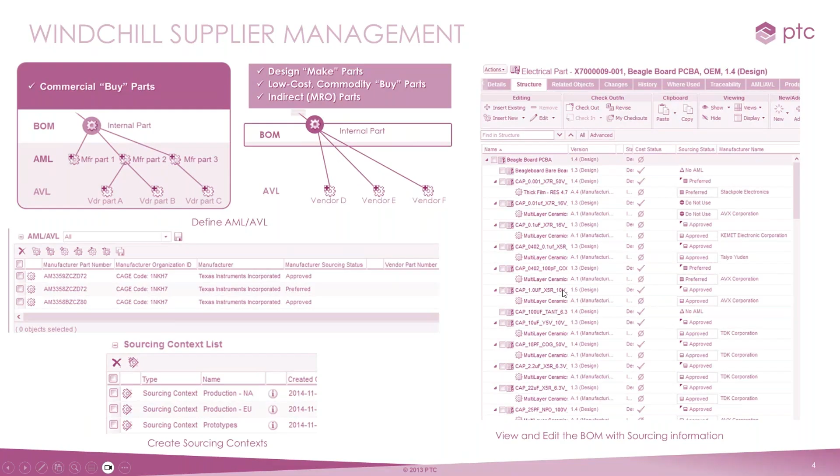All right, so we're going to go ahead and jump into a demonstration.

The first thing we're going to deal with is the actual part classification. We're going to go through and find files. By using part classifications, when you go into the search tab, you still have your saved search information, that's all still there. You still have your advanced search where you can categorize and even use some of the attributes you define as search criteria.

But we also have a classification explorer, so we can go through and set up classifications. Now, this is once again one of those PLM type things, and we're using WT parts, so this is where all that information begins to grow. This isn't directly associated to a CAD file. The CAD file can be associated with the WT part file, but all this information we're collecting is directly associated with the WT part files.

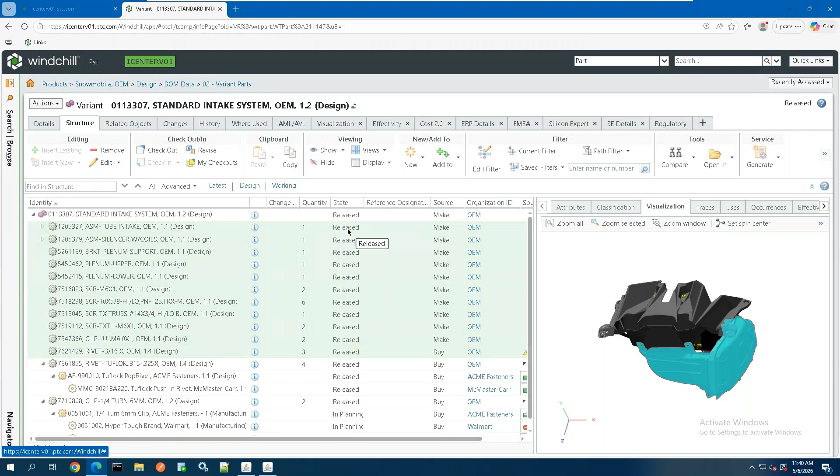That may actually have, yeah, like this one. We may have one that's a manufacturer, and I don't know why we're doing it from Walmart, but Walmart is the preferred vendor for that particular object. So if it's a manufacturing, or once again, if it is a make object that's actually happened to be a buy, sorry.

But if we do have a make object, then the same thing goes. We can go into this particular file. I'm just going to go to the information for it. And then the same thing inside of here. Now we're just going to go through and define who is the actual vendor that we're going to buy it from. So with that, come over here. We are doing a vendor, and this is going to give us the vendor information. And now we go through and specify who we're actually going to go through and make this for us. So all of that is there.

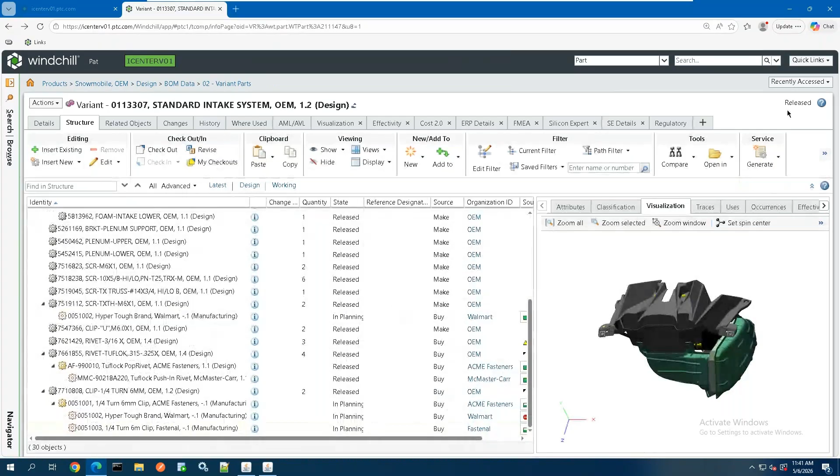Now, once again, the benefit of all of this is that this information, as we see it, can then be exported. So I can come over here, do my report, and do a report that shows multi-level with approved vendor and approved manufacturer list. So now we can go through and actually see this information, and we can see once again at the bottom there is that exact information that we wanted. And now we can go through and export this as one of those object types or file types. So we have it all there.

And once again, this is now where we have that connection with purchasing. We can have that connection with manufacturing. We can have that connection with our ERP environment.

Any of that information that we want to go through and translate from one to the other, we now have that information inside of our Windchill environment as well. So this is now where we can sync up those two objects, as far as, yes, we found the files, which is great. So we use the classification to find the files. Not only did we find the files, but now we also see where we should purchase the file from.

So I'm not reinventing the wheel. I found what I needed. Oh, I created this one. Is there something similar to it? Okay, similar to, okay, here's another one. Great. Here's where we buy it from. Here's a vendor. Here's the other stuff we buy from that vendor. So there's so much information that we can go through and gather from within inside of our environment, just by going in and selecting and viewing the different object types.

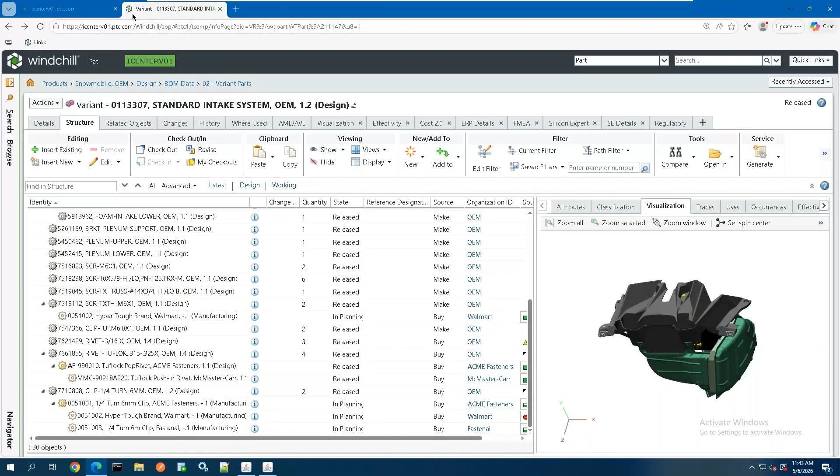So once again, it's a combination, of course, as I mentioned before, of the classification searching, using this, going up and setting up classifications, as well as once we have the objects, we can then go in and actually specify what the critical information is as far as purchasing those items. So as I said, you'll hear me continue to mention, the more you put in, the more you get out. And this is one of those scenarios where this is critical information. We need to know that.

So we can create a bill of material that has all that critical information in there, including the vendor part number. So when I'm going in and purchasing this from McMaster-Carr, I know that this is the part number that I'm ordering directly from McMaster-Carr that is associated with this object. So that's where all these things once again loop together.

And as I mentioned before, that information can be exported into that bill of material and used in whatever application that we want to, or, because we're looking at one source, give your marketing department, your purchasing department, all the manufacturing access to Windchill, and they can go in and look at this stuff themselves. You don't have to print it out. You just simply let them know it's available through a workflow, giving them a notification that, hey, bill of material is done, properties have been assigned, go and look at X, Y, and Z.

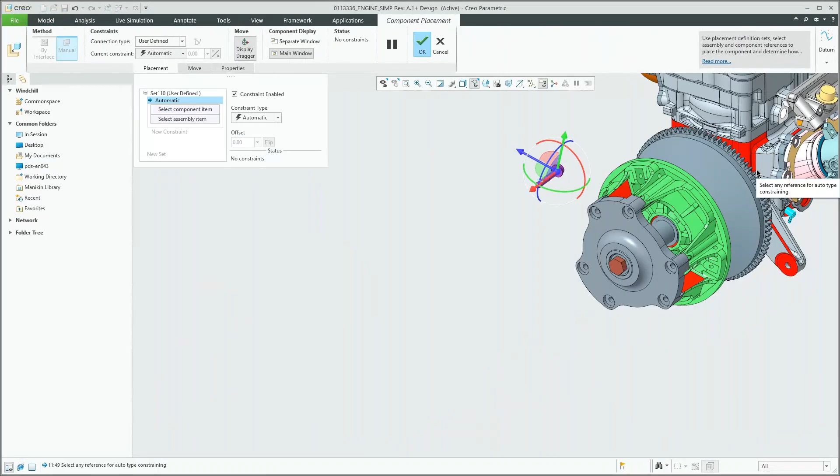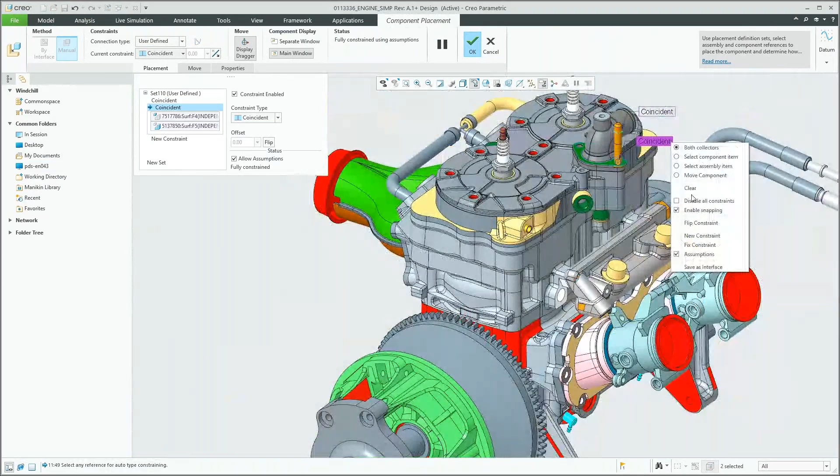I can still use the tools, and I apologize I didn't use it appropriately. I was trying to rush through it. But I could use the tools to define the information. Put that up so I can see it. Change that from distance to coincident, and then also take that and flip it. Wonderful.

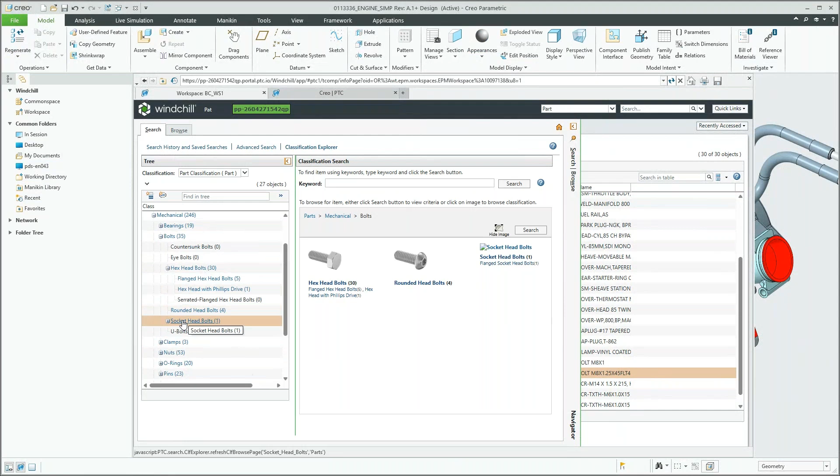So same thing, as I mentioned before, we can use the tools inside of here to use our classification search. Once again, I know that I'm looking for a bolt, I'm looking for a hex head bolt, so on and so forth. So I can use any of that. And once you get to that top level area, you can now select on the search, and there's the item that you want. I know I'm looking for this particular bolt type, so I can use that as well. All right. So last thing I want to do is hit a couple more slides, and then we will call it complete.

All right. So once again, what does this mean in practice? It basically means it increases the part reuse. That's one of the biggest things that I know customers have, is that I want to reuse something instead of duplicating it every time. We need this size bearing. We need this size washer. We need this engine. We need this motor. Didn't we buy that already? I think we did, but I don't know where it is.

Those part classifications with all of the different attributes that we've defined, the motor speed, motor size, mounting holes, whatever you want to specify, those things can be set up, and that can be information that we use to filter. Reduce duplication, very important, because duplication means we're buying things in fewer quantities. We all know that the more quantities you buy of something, the better of a discount you may get.

Better sourcing decisions, improve product quality, and then of course control supplier onboarding. So as we're setting things up, we're going to make better decisions. By making better decisions, we end up with better quality products. And then of course, when we're purchasing things from our vendors or suppliers, we now know who to use and who not to use. How to get started.